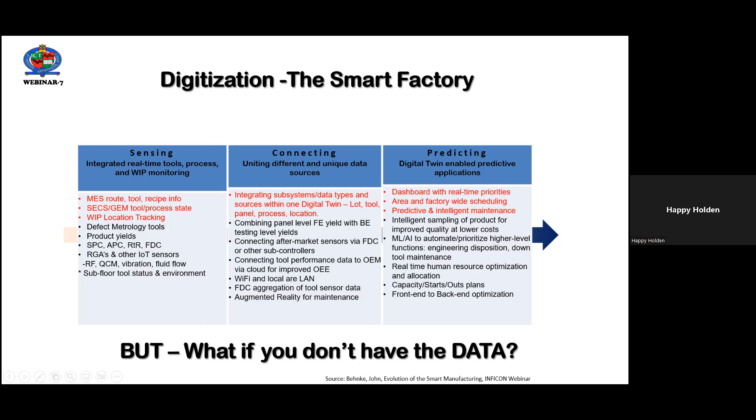Like I said, we talked last week about digitization and the smart factory and sensing, but there are intermediate steps, because what happens if you don't have the data and are not prepared to collect it? Well, all is not lost. You can still start, as I'll show you a couple of techniques that I've used in the last 50 years.

And the first one is dimensional analysis, which will go into the methodology and the creation of dimensionless parameters in engineering. So I've kind of determined that there's 4 levels of metrics or measures of performance for both product design, process effectiveness, quality.

And those 4 levels are no opinion. That is, you don't have anything. There's no attempt to inspect, improve. It's just kind of an over-the-wall process, no communication. Then there's opinion, and expert opinion is applied after or concurrently with design and manufacturing. Many times it's an inspection process by production engineers or CAM people in printed circuit fabrication, but it's still an opinion. Then there's an intermediate one called the figure of merit, which I've invented.

So both the process and the product are scored by linear equations developed by expert opinion and a consensus methodology that we'll talk about. The last one is the metrics or measures that both the product and the process can be measured by, physical data which everybody can inspect and work with, and was supported in the first lecture about design of experiments, where we talk about qualitative and quantitative variables.

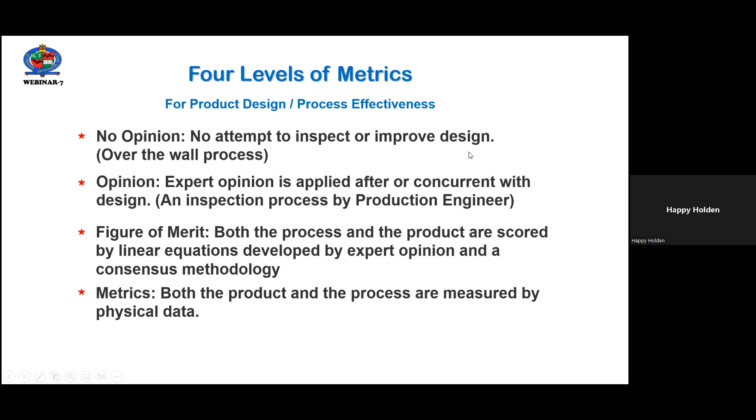But there's also 5 stages of these metrics, and that is kind of the age of anarchy that most people are still in. That's anything goes. We just run it by the seat of our pants.

There's an age of folklore, about 25, where wisdom is actually passed from one generation to another over pizza and beer, informally, maybe documented or not. And then comes the age of methodology, where manufacturing or design for manufacturing is engineered, documented and actually done that way, many times using the figures of merit.

Then there's the age of metrics, which starts getting slimmer, where both the product and the process are measured in standardized ways. And then the actual age of engineering, where productivity is achieved through continuous quality improvement, much like it is in enlightened manufacturing.

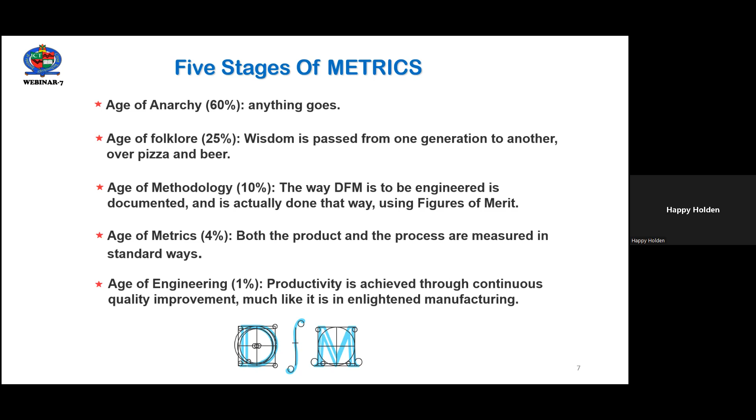So the first one is the dimensional analysis, which was created in 1877 by Lord Rayleigh. This was taught to me very early in my engineering career, and I'm not sure if other chemical engineering universities taught this or not, but here it is.

And the Rayleigh method is that you gather all the independent variables that are likely to influence the dependent variable that you're interested in, to try to develop an analysis or equation for. If R is a variable that depends upon the independent variables R1, R2, R3, etc., then the functional equation can be written as R is a function of these independent variables.

Write the above equation in the form of C, R1 superscript A, R2 superscript B, where C is the dimensionless constant and A, B, and C are arbitrary exponents.

Then you express each of these quantities in the equation in some basic units in which the solution is required. And then by using dimensional homogeneity, you obtain a set of simultaneous equations involving the exponents A, B, C through M. You then solve these equations to obtain the values of these exponents, A, B, C, etc.

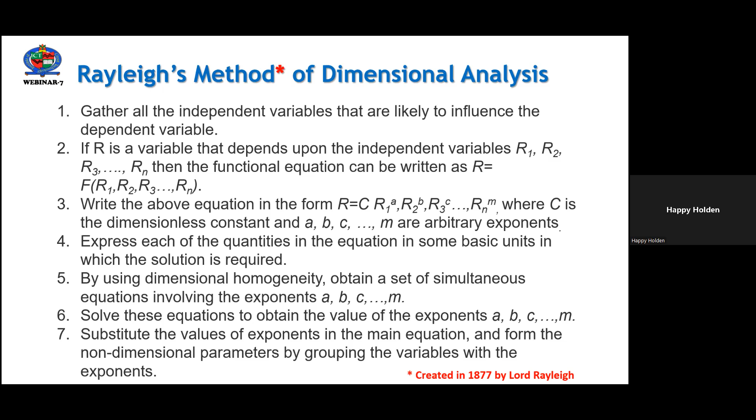And then you substitute the value of the exponents into the main equation and form the non-dimensional parameters by grouping the variables with exponents. So I'll give you an example of that.

This is an example which is easiest, which is fluid flow in pipes. So gathering all the independent variables that are likely to influence the dependent variable, and that's fluid flow in pipes, either by head loss, energy loss, or some other value. So we have pipe diameter D, fluid velocity V coming in, fluid density rho, and fluid viscosity mu.

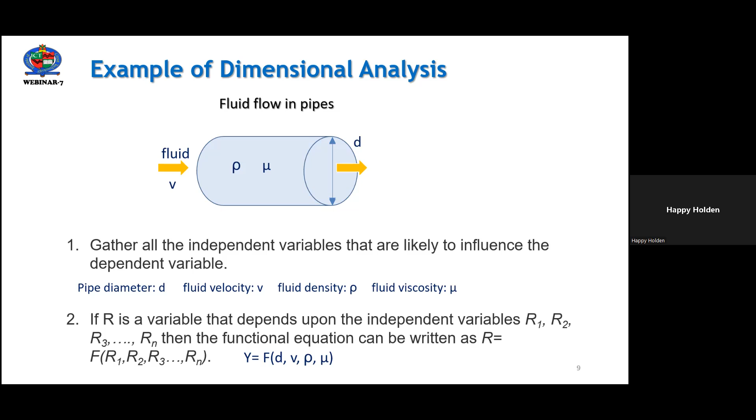So if R is a variable that depends upon the independent variables 1, 2, 3, 4, then the functional equation can be written, Y is a function of D, V, rho, mu, as seen here in the slide.

So we write the equation in the form of C, variable 1, variable 2, to the exponent A, B, C, and D, where these are just arbitrary exponents.

And they express each of the quantities in the equations as some basic units in which the solution is required. So pipe diameter D will be in inches, it could be centimeters. Fluid velocity in inches per second, fluid density in pounds per inch, fluid viscosity in pound inch per second.

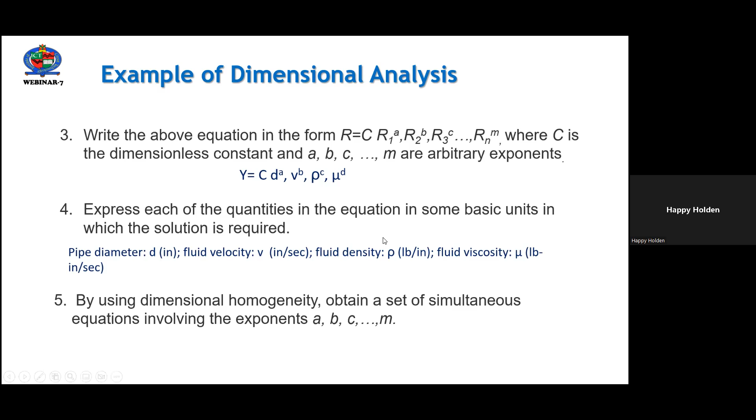And then using dimensional homogeneity, you obtain a set of simultaneous equations involving A, B, C, and D, shown here. And then you solve these equations to obtain the value of the exponents.

And here, A will equal 1, B will equal 1, C will equal 1, and D will equal -1. When you substitute these exponents into the basic equation, and there's no overall constant C on this one, you end up with the equation D rho V divided by mu.

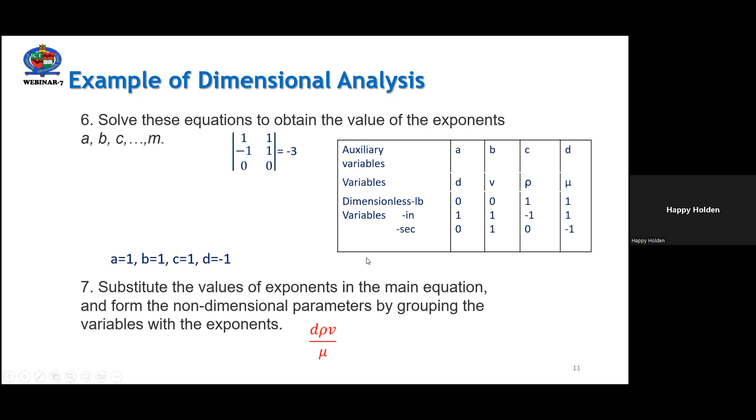Well, that is a thing that we call the Reynolds number. It was first described quantitatively in 1883 by Reynolds there in the UK. Reynolds found that fluid velocity, fluid density, fluid viscosity, and pipe diameter determine the nature of fluid pipe flow. These 4 variables combined in a single dimensionless parameter called the Reynolds number, and it's called that because all the units cancel out. There's no units associated with the Reynolds number, it's just a number, a dimensionless number.

In many ways, I call this a pseudo-independent variable, because this is a stand-in for these 4 independent variables. Dealing with that many independent variables is very, very difficult, whereas dealing with the Reynolds number is a single pseudo-independent variable.

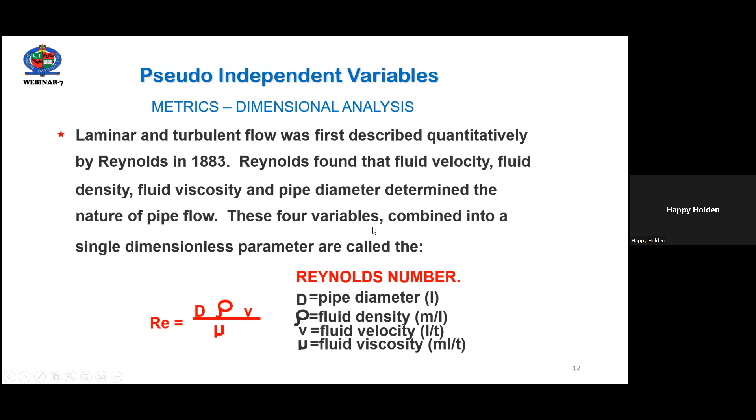And that allows us to create what we call the Moody diagram. You can see here where friction factors and relative pipe roughness can be plotted against the Reynolds number along the bottom there, from 10 to the 3 to 10 to the 8. With this, we can talk about turbulent flow, laminar flow, transition regions, smooth pipes, rough pipes, even material construction. This is fundamental in mechanical engineering to flow in pipes, not just of liquids, but also of gases and other materials. But you can see it would be extremely difficult to do this friction factor if we dealt with only one of these 4 independent variables that makes up the Reynolds number.

But the Reynolds number itself solves this for us and is in fact based on physical data, but just not used individually.

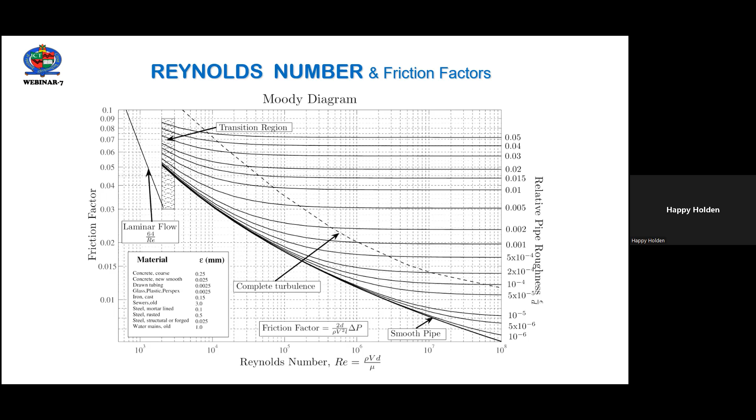Interesting enough, there are 152 of these in the world of engineering. Engineering totally depends on these dimensionless parameters. I have them listed here alphabetically from acceleration, but it covers all the things in momentum transfer, mass transfer, heat transfer, and even fundamental electrical magnetism and electrical forces and fields for motors and things like that. You may have heard of some of these, Euler, Froude number, or ones like here.

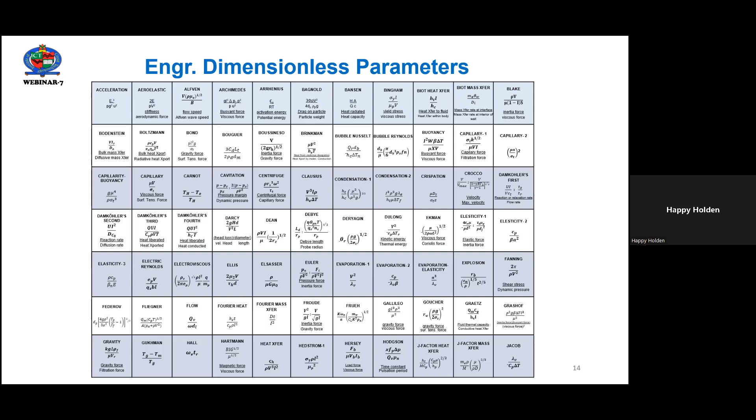One that everybody's heard of is Mach number. Many people think of the Mach number as a velocity. Actually, it's a number, it has no units. It can't be velocity. It's actually the inertial force divided by the elastic force that makes up the Mach number. And when you exceed Mach 1.0, you've exceeded the speed of sound at that particular altitude because of the inertial and elastic forces.

But there are other ones that I've learned to use a lot: Prandtl, Grashof, Nusselt, Stokes, Taylor, et cetera, through my career in the last 50 years. And in fact, these are essential. I don't know if you've ever seen all 152 of them. The one we just talked about was the Reynolds number there in the middle of the chart. But these are really important, and without them we'd have a much harder time, especially before the use of computers, doing the engineering design equations that run the world.

So this idea that we have created lots and lots of pseudo-independent variables in order to get engineering done led me to believe that it's possible for us to create other pseudo-independent variables if it serves a purpose. What I developed and call a figure of merit process is one of creating an equation and a measure of performance that we've not used before.

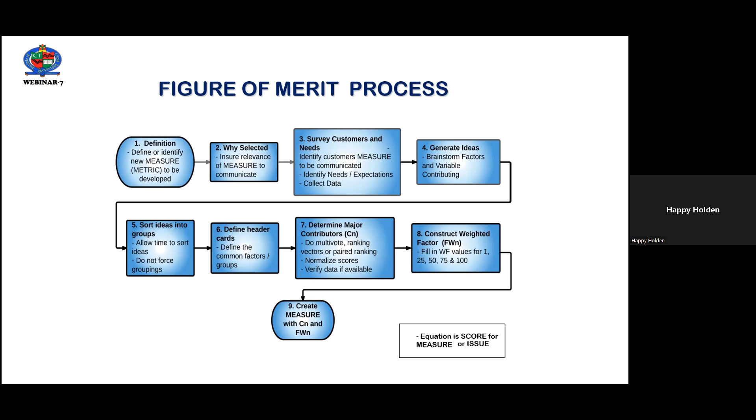And then you construct a weighted factor for variables from 1 to 100. This creates your equation that's a score measure. So we'll go over these things, surveying customers or needs.

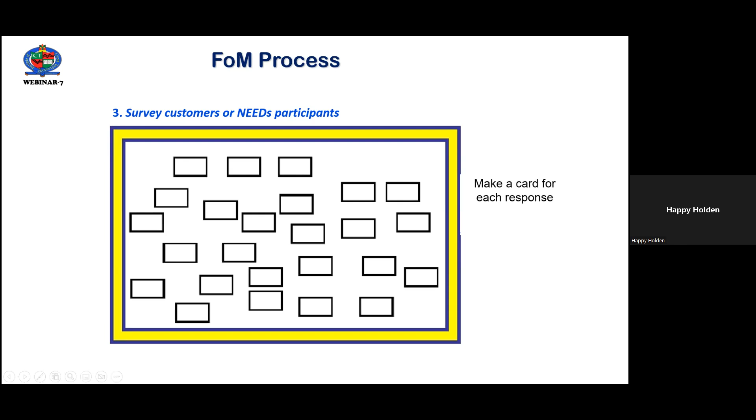Prepare before you start, kind of make a card of each response. We use the typical 3M Post-its for this, on a wall somewhere. This is kind of where we start.

Then we start brainstorming ideas, everybody in the group. We go around and each person brainstorms what they think is important in this, without criticizing or anything like that. Whatever they say, we write down on a Post-it and put up on the wall. We do this for a couple of hours.

In other words, once you've gone around a couple of times and people say, well, I don't have any more ideas, you don't let them stop, but focus on digging down deeper, into some level that they didn't wish to express, but now's the time to bring it out and put this idea down on a card that we've got up there.

So you display all these completed idea cards randomly laid out so that all the team members can see them.

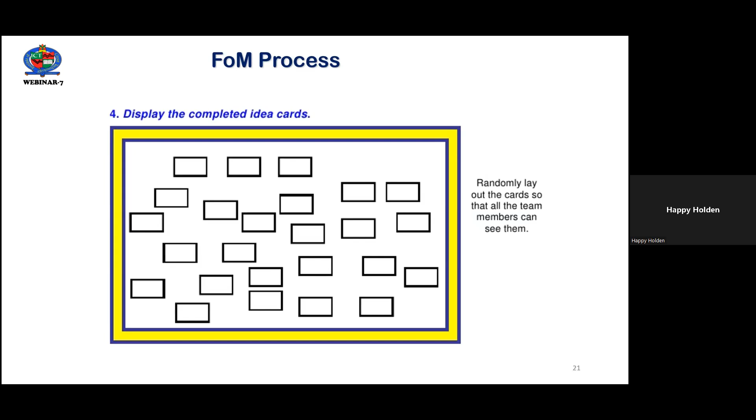And then you start to arrange the cards in natural groupings. Again, this can take a couple of hours, but the purpose of this step is to collect the ideas that go with each other.

And in silence, you're not allowed to debate. All team members should simultaneously begin to move the idea cards, collecting and arranging in columns the cards that each person believes belong together. This process can take a while, because some people may arrange the cards and somebody else will come along and unarrange that particular pile and put it into another pile.

So you've got to allow this to completely take place. And then it's good to have a facilitator who's not involved in the process, but simply facilitating, because you don't want to have arguments in which one person believes this card belongs in this pile and another person believes it belongs in that one.

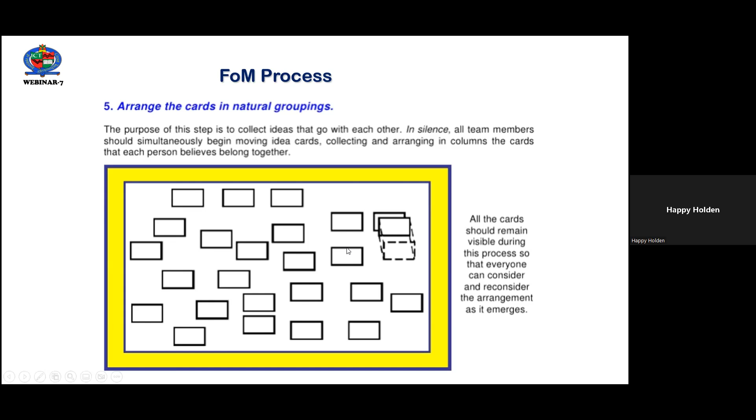The facilitator steps in and asks the question, why do you believe this card belongs in this pile? And they explain it. You say, well, how about if we reword this idea this way? Then you talk to the other person, why do you believe it's in this pile? And they explain, oh, well, let's reword this idea so that it clearly belongs in this other pile. This can take a couple of hours of interaction until everybody is settled with the groupings.

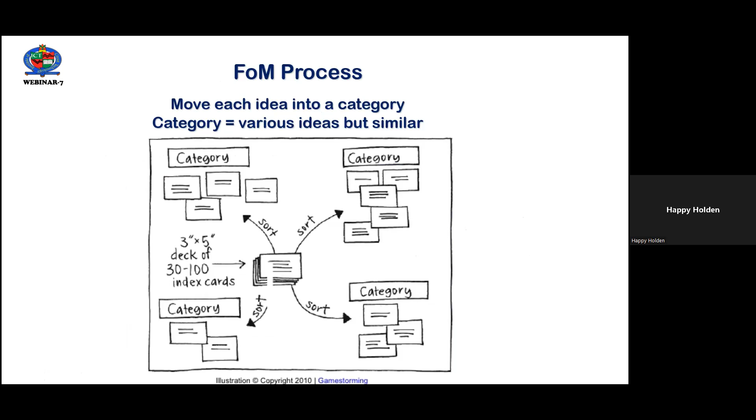So you're moving each idea into a category, various ideas but similar in terms of what they're really primarily focused at, and sorting these.

And then finally, if the cards are redundant, overlap them, but in such a way that they can still be read. Team members should freely change cards between groupings or create new groupings as they feel appropriate.

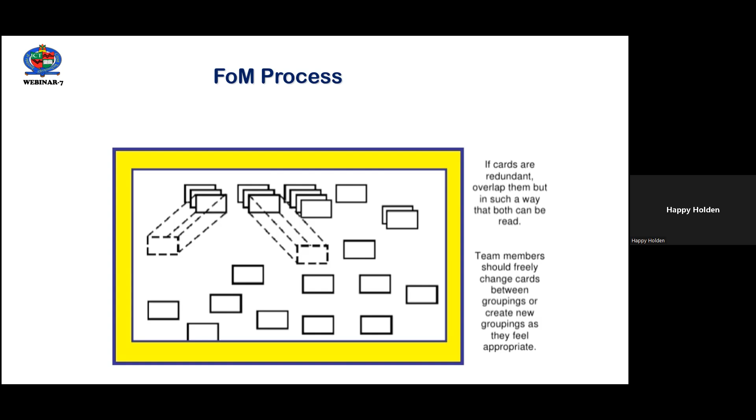You may find that if you move back and forth, the idea you're moving needs to be in its own separate pile and not part of the pile that we've stacked there, because you get to the next step.

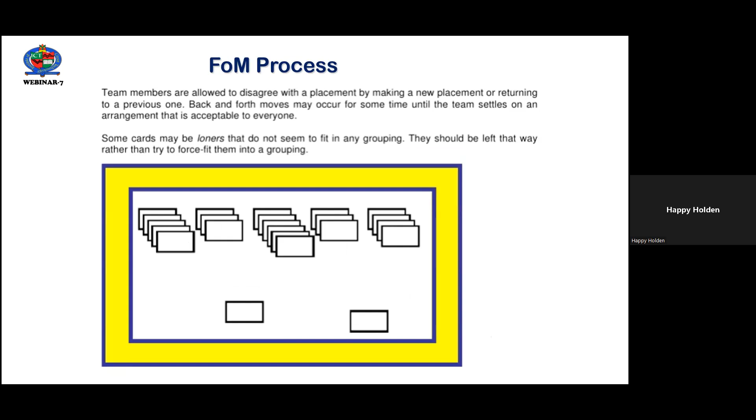In returning back and forth, the moves continue until the team settles on an arrangement. Some cards may be loners that do not seem to fit in any grouping. They should be left that way rather than try to force fit them into a grouping.

And what you have now is these post-its that are in these natural groupings. Then you create a header card, and a header card is what the group believes that pile actually talks about. It may simplify all these different ideas, but what's fundamentally is this really talking about, in only a few words?

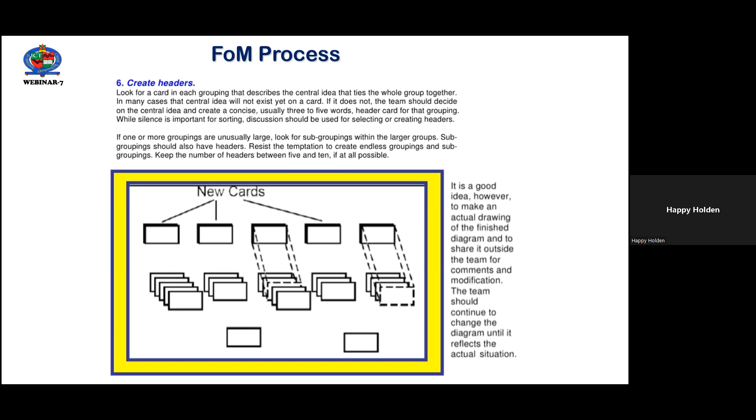These create the headers for these piles, and that's what we call an affinity diagram, creating these header cards to make sure that each header placed at the top of a group captures the essential link among all the ideas beneath it, and consists of enough words to clearly convey the meaning. And these are header cards that you have.

Drawing the finished clouds of affinity, in other words, the header cards now describe all of the independently produced brainstorming ideas, grouped into categories.

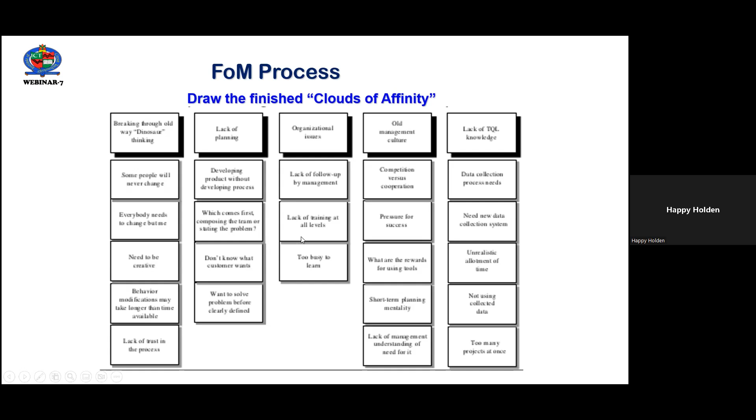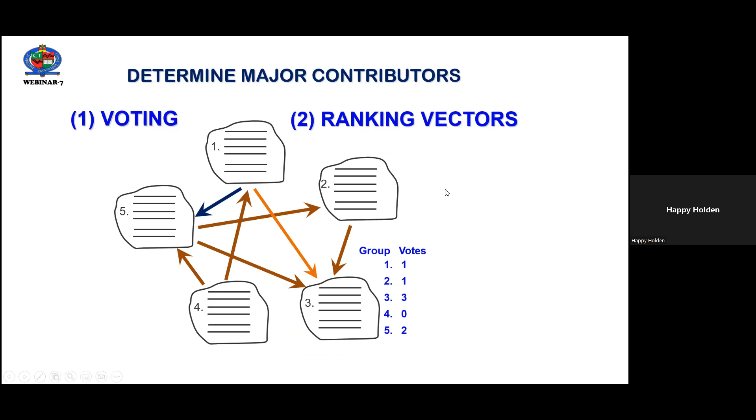Now you determine which of these are major contributors, and you can do this by voting. You can give everybody a number of votes to place, or ranking vectors, as you see here. I prefer the thing called paired ranking.

I think paired ranking is the most effective, because you list all of your categories on both the vertical and horizontal axis, draw a diagonal between them, and then we simply do a voting.

Idea category 1 versus category 2 - how many feel that category 1 is more important than category 2? If it gets the most votes, it wins. How about category 1 now versus category 3? And 3 wins, so category 1 loses. How about category 1 versus category 4? Well, actually, it's a tie. Or category 1 versus category 5, it wins.

Now we go down to category 2 versus category 3, category 2 versus category 4, category 2 versus category 5, and so on - 3 versus 4, 3 versus 5, 4 versus 5. And then you count up the number of wins, losses, and ties.

Well, this is the coefficient of a major contributor, my C sub n: 2, 3, 2, 0, 2. Interesting enough, since category 4 had no wins, it drops out.

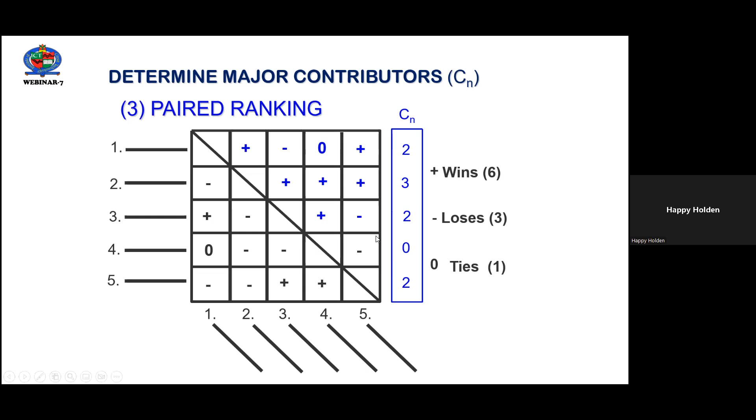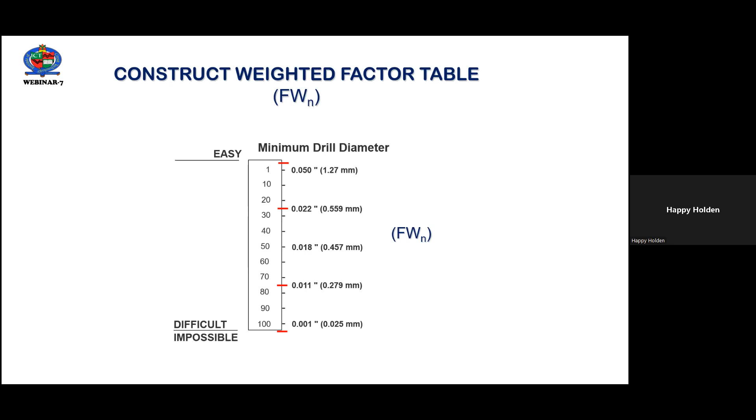The next step is that you create a weighted factor table about the categories, and you do it from one, which is easy, all the way up to difficult to impossible, whatever that may be. My example here is the minimum drill diameter in through-hole drilling, from 1.27 millimeter - easy to do - to a 1 mil diameter, which is difficult, if not impossible. Then you define the 50th percentile, 25th percentile, and 75th percentile as a weight.

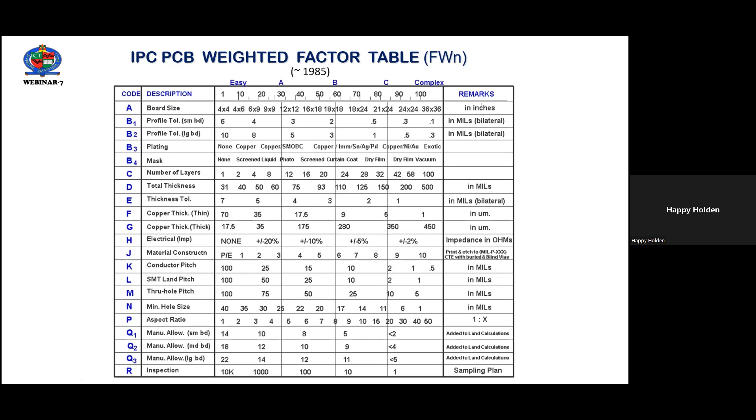About 1985, Dieter Bergman and I undertook a look at a lot of PCB design variables and fabrication variables, and created this coding of 1 to 100, from easy to complex. This is from 1985, but you can see the different values there. So you create a linear equation by taking the number of votes, C1, times its weighting factor, and C2 and its weighting factor, and C3, all the way.

Once you have this scoring - in this particular case, we were focusing on producibility - we now had a measure of producibility at the design stage. And we could go back and correlate yield, ease of manufacturing, and cost with this scoring equation, which provided design with the ability to know whether or not it had designed something that's producible.

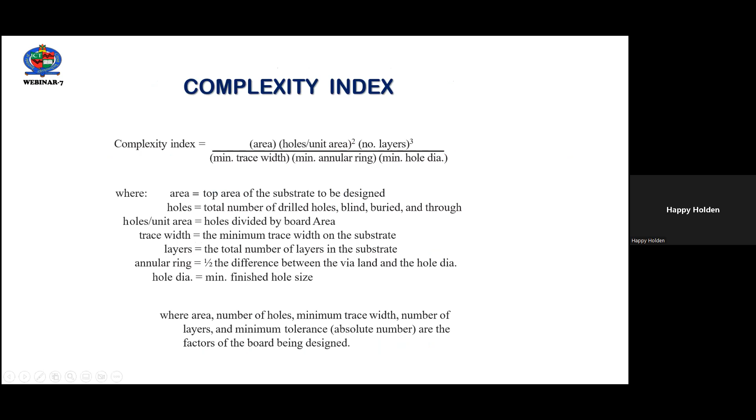So that's in many ways how we came up with the complexity index of how complicated is the printed circuit board, both from fabrication, assembly, and design.

I use what we call the Gompertz curve, which Benjamin Gompertz in 1825 created as a mathematical model for time series. I'll show you right there. It asymptotes from 0 to the asymptote. But I use...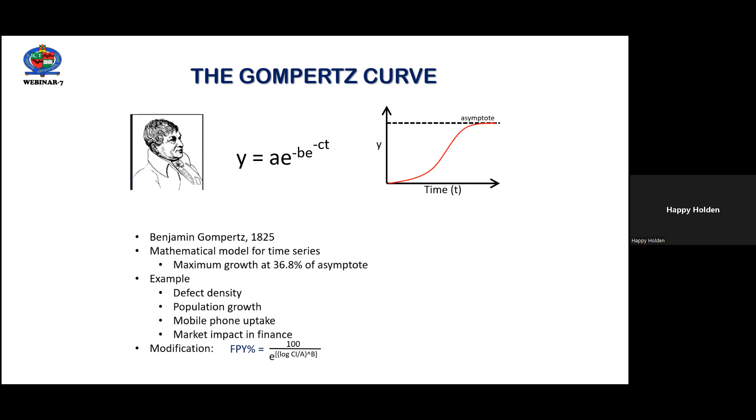Have we lost you, Happy? We're just waiting for Happy to sign back on again.

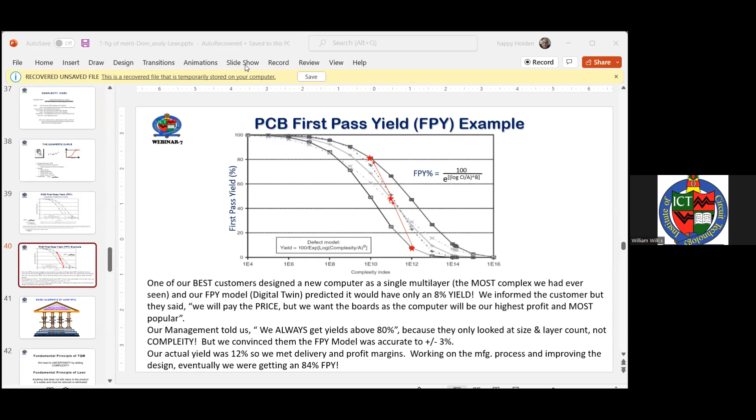Okay, this is where I think we dropped out. Anyway, like I said, one of the examples of how this paid off was that when our customer produced this single multilayer that was the most complex we'd ever received, this model predicted we'd only have an 8% yield, which management said, no way, we always get above 80% yield.

But we convinced our management, no, this model is pretty accurate. And we've informed the customer that we're only going to get an 8% yield, but they're willing to pay the price. It's just that we're going to have to start a lot more blanks in order to meet shipment date.

And even though management objected, said that it's got to be 80%, our actual yield on this production was 12%. So we met delivery and profit margin. And working with the manufacturing process and improving the design, we moved up to 50% yield as they simplified the design, and ultimately up to an 84% yield.

You can see there. So, although we always like to get 90 or 95% yield, you can design a printed circuit board that's almost impossible to build, which is what a customer did. Like I said, our model indicated we'd get only 8% yield, but they said, we'll buy it, we must have the boards and we'll pay any price.

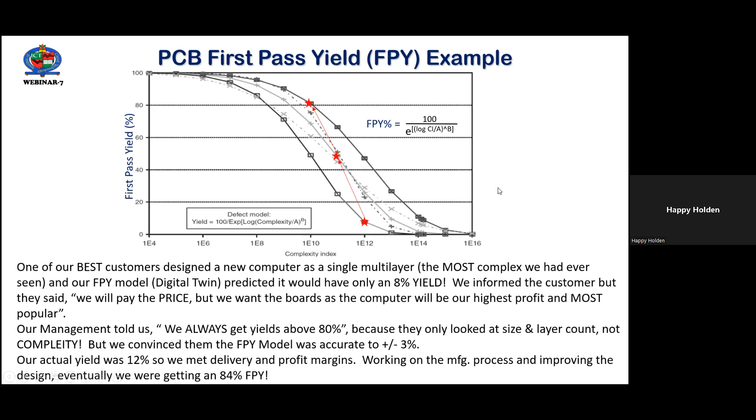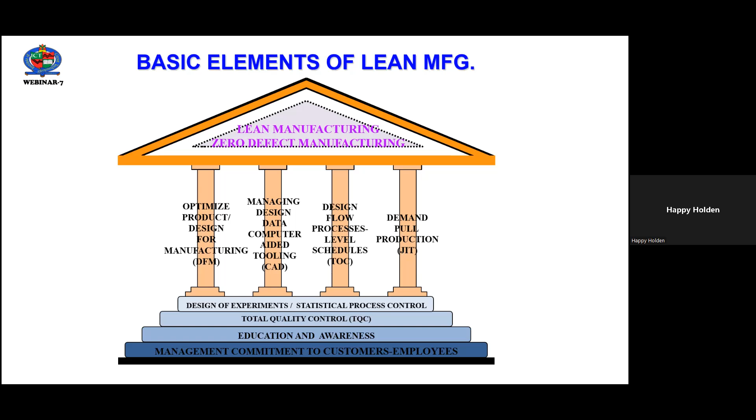So with that, in the last few minutes, let's talk about basic elements of lean manufacturing, which focuses a lot on zero defect manufacturing and demand pull production, designing flow processes to level schedules, managing design data and computer-aided tooling, as well as optimized product design and design for manufacturing. This builds upon what we've already talked about: design of experiments, statistical process control, and total quality control.

The fundamental of TQM was that we react to uncertainty by adding complexity. And a fundamental principle of lean is anything that does not add value to the product is waste and must be reduced or eliminated. So we react to uncertainty by adding complexity.

If we don't trust the vendor's performance, we add another vendor. If we don't trust our capacity, we add lead time. If we don't trust our inventory levels, we add more inventory. If we don't trust our quality, we add a rework station. If we don't have time to do something right, we add more time to do it over.

In other words, our business culture reacts to uncertainty by adding complexity. Gaining control over and reducing complexity are the primary objectives of total quality management. Lean has the task of organizing and simplifying complexity in manufacturing.

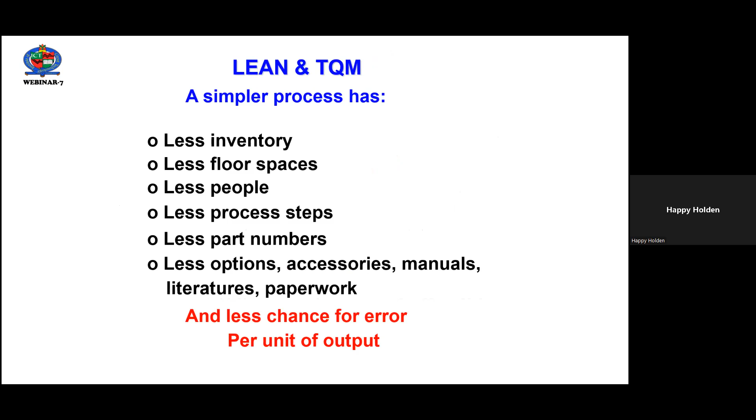Lean in TQM results in a simpler process that has less inventory, less floor space, less people, less process steps, less part numbers, less options, accessory manuals, paperwork, and less chance for error per unit of output. And so Lean and Six Sigma go together: Lean eliminates variability, and Six Sigma identifies and eliminates complex sources of variability.

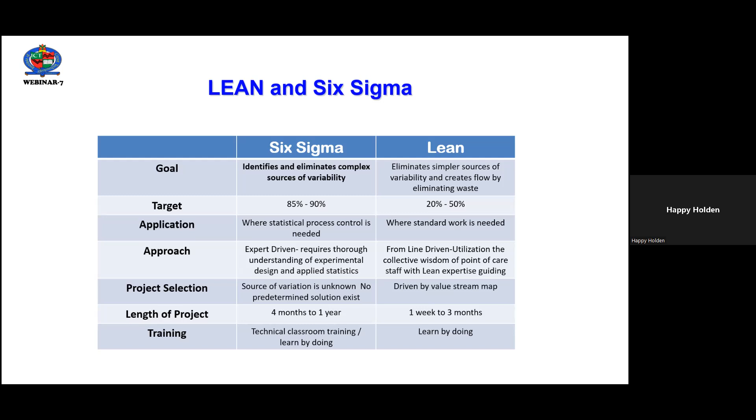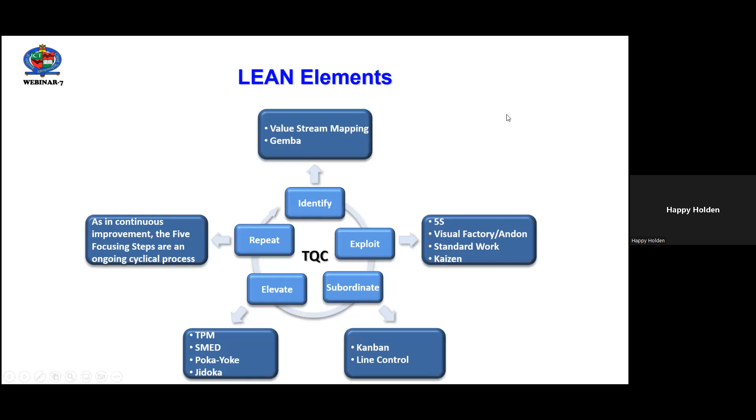So we talked about Lean and Six Sigma, and they both contribute to this idea. Lean elements are many: value stream mapping, the 5S visual factory, standardized work, Kanban line control, streamlining, and continuous improvement. So integrating Lean into the Six Sigma program is important, using Lean tools to accelerate the improvement and change to manufacturing.

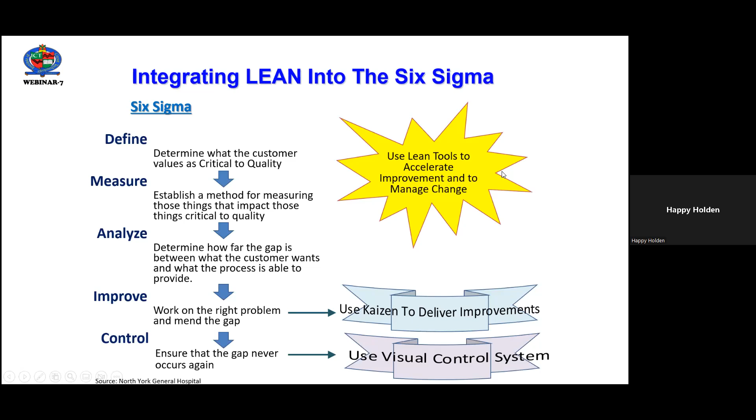Especially eliminating waste. And waste can be waiting - how much lag time is there between production steps? We showed in the Whelen video that from drilling to final fabrication - the entire metallization, imaging, plating, etching, stripping, solder mask, and final finish - takes only 258 minutes. So if your manufacturing time between those things involves days or weeks, anything above 258 minutes for the final finish of the board is wasted time.

And that wasted time is where you end up with oxidation, scratches, bumps, fingerprints, everything else. And so eliminating that waste can be a major focus of automation in terms of defects, workforce, and motions, to design a simpler manufacturing system.

If you go back and actually look at the articles written about the Whelen facility, you'll find that they make a multi-layer board in 60% fewer steps than you do. And the reason is that they've taken out all the wasted steps due to time and sitting around in the shop. And that's one reason why, no matter what the volume, from 1 panel to 100,000 panels, the manufacturing time is still the same.

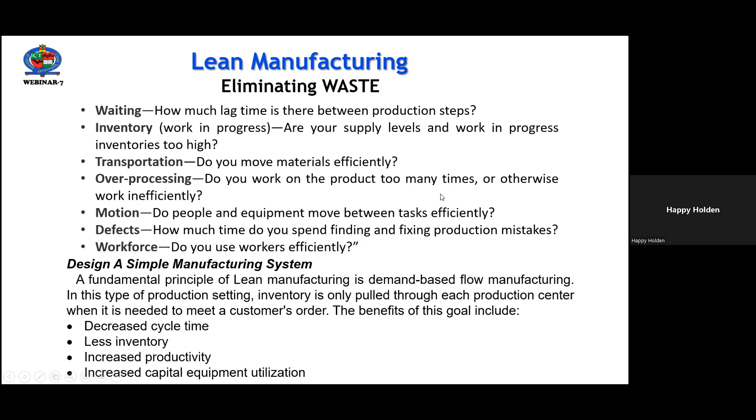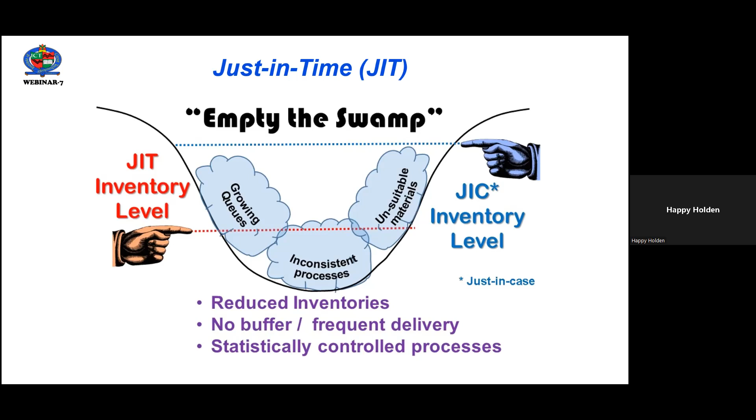still the same lead time because of the simplification of the manufacturing. So just in time is one of those, although just in time with what we've dealt with in the supply chain is looking back at just in case inventory levels. As you rebalance your supply chain, what can return is reducing inventories rather than building inventory for the just in case by emptying the swamp.

And this can be a major focus of automation and future business activities. Utilizing CAM and CAD systems does not indicate that you can design a high quality board.

As I've illustrated here humorously with an Escher diagram, a computer doesn't know that something is not manufacturable. If you look at this rectangular extrusion bracket using ambihelical hex nuts, techniques like that, it's an optical illusion, but nonetheless produced by a computer. Many times it doesn't know that this cannot be built, and many times that's what we have in the output of the EDA tool from a PCB design.

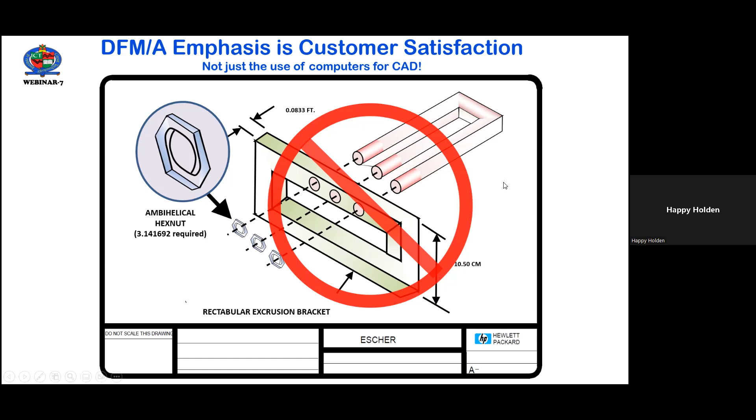This happens to be from a famous article by IBM on the IBM design for assembly methodology, where they have these factors in their assembly process and the scoring in terms of number of points.

This allows their designers to look at how do I get a discount. You need 61 to 75 points to get a 10% discount, 76 to 100 points to get 30%. But if your board is 0 to 60, then you're going to pay a price premium of 10% or 30% over.

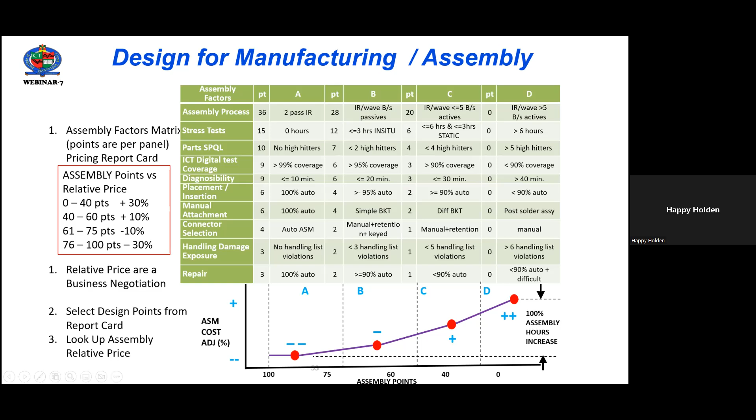And these relative prices are a business negotiation. But implementing this design point from a report card ended up with everybody in IBM shooting for the above 60 points measure of performance in order to get some kind of discount, rather than making it harder and harder to manufacture. In fact, designs were easier and easier to manufacture.

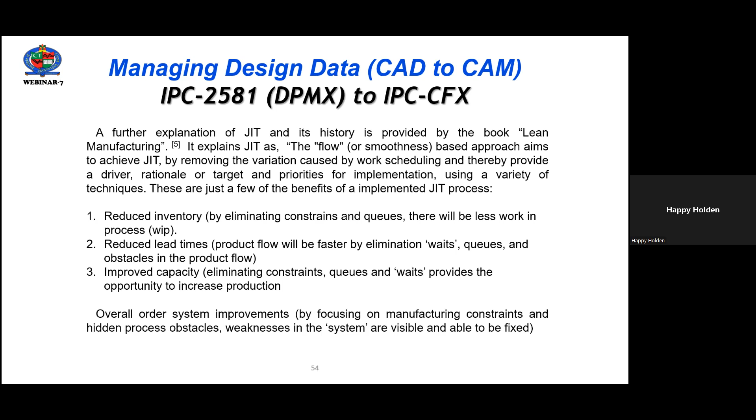And another way we're trying to do that is through IPC's 2581 DPMX, which will flow directly into the IPC CFX program that we've talked about.

Theory of constraints is another methodology identifying limiting factors, as well as the Toyota way, the Kanban method, and the Kanban-Heijunka box, based on 5 related items describing workplace practices conducive to visual control and lean production.

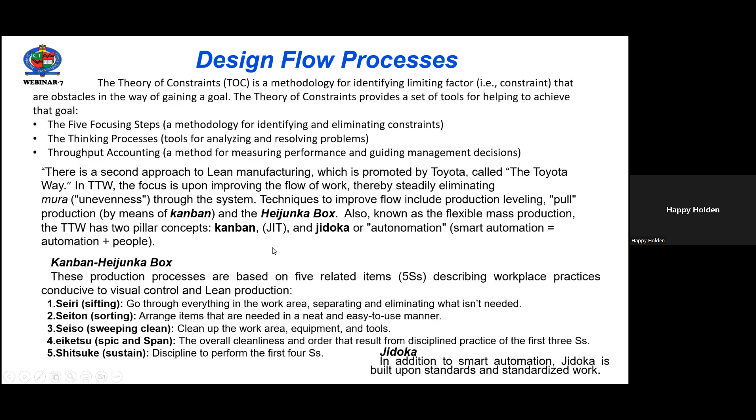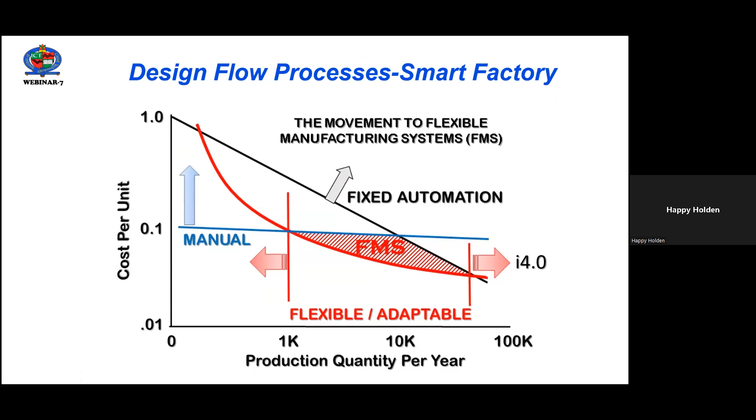Also, what we've talked about is simplifying the work centers through automation and material handling, as well as selecting advanced manufacturing equipment that may be flexible in terms of flexible manufacturing systems for the smart factory of the future.

So the 24 Essential Skills ebook has a complete chapter on DFMA. We can study it at your leisure, and we're not going to cover that in this series.

And the figure of merit uses the critical factors as variables in design of experiments to produce an equation based on data rather than opinion. If there's more than 8 to 10 variables, both qualitative and quantitative, then a Taguchi orthogonal array will have to be used, which is an advanced statistical technique that you can study on the Engineering Statistics Handbook we talked about in the first one.